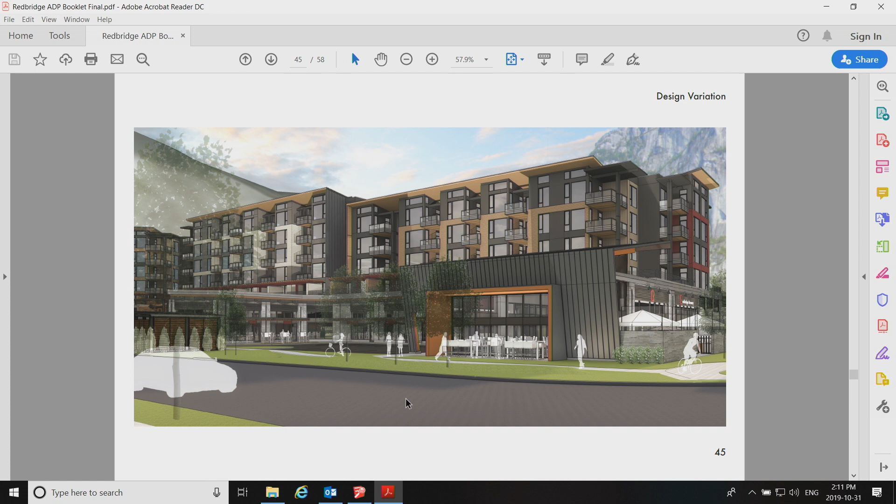And it's again the same material palette. And then if we go to the other rendering, we got that one.

So the other thing we've done is we've lengthened the amount of glass facing the highway. We've extended our retail space along the highway, and then that pitched roof acts as a bit of a catcher to the eye as you come down the highway. We've still maintained a sitting area on the highway side.

We think that would add some nice animation to the entrance to Squamish. We brought our red color back into there, and on the building itself we've decided to color the end panel, bringing our red into that one panel to give a little bit of impact to this side.

And then we've brought some extra bouldering in to really make that base feel like it's growing out of the rock. And then the concrete base, we've punched some holes in it.

We're just debating how best to handle those holes, because I don't like looking into parkades and seeing ugly lights. So we want to have a nice screen or something in there too. I like the idea of some presence behind that, but I don't like seeing terrible parkade lighting, which is typically what we have. So that's something we're working on, making sure we get that right.

We've also provided signage, and we looked at a bunch of locations for it. We felt that if we put it at the corner, it actually obscured the views up and down the highway. We thought it was a safety concern, so we brought it to the joint between the retail and the parkade part of the project, and we've created a sign that, if you close up on it, has Redbridge at the bottom.

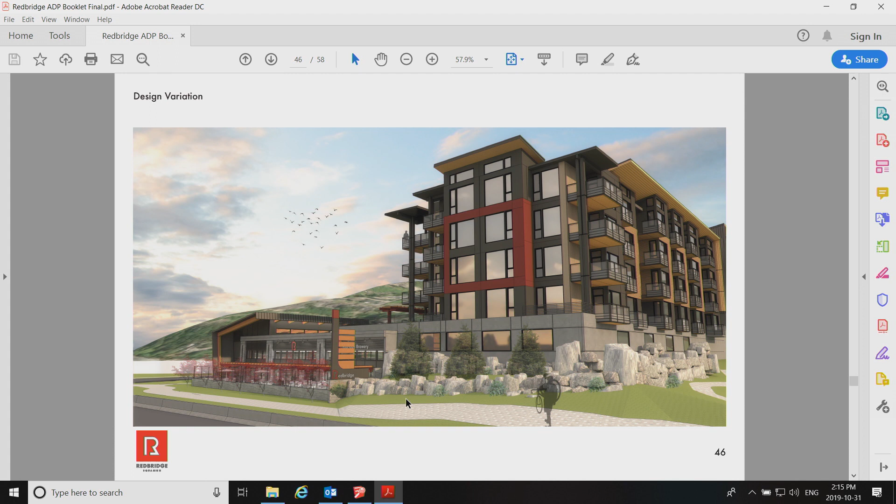And so that's that piece. We also talk a lot about social sustainability, and the project really was very much planned around that idea that we have this small retail space that I see as a real asset to the project. It's really an amenity in my mind. It's a place that we can have some gatherings, and we certainly see the parking lot as being something that could be closed off for a little festival or a farmer's market or those kinds of events. And we're going to surface it with a nice material so that it's not an asphalt parking lot. It's got a nice feel to it.

So the commercial piece is one of the pieces I would talk about, social sustainability. We have created a very distinctive child's play area, and Peter will talk to that in a few minutes. An outdoor one, and it's related to an indoor area that's really got a family focus to it, because families need different types of space than adults do, and sometimes adults want to get away, and sometimes they like to be with the families, and it depends on what stage your life is. So we've tried to do a project that kind of looks after those life stages as well as we can.

And then we have our amenity space, which is really about well-being: red light therapy rooms and saunas and cold plunge pools and hot tubs, and then the co-working aspect of the space that we put in, and then the yoga aspect of the space. So we've tried to think about sustainability as energy switching, and this kind of social sustainability is our major focus.

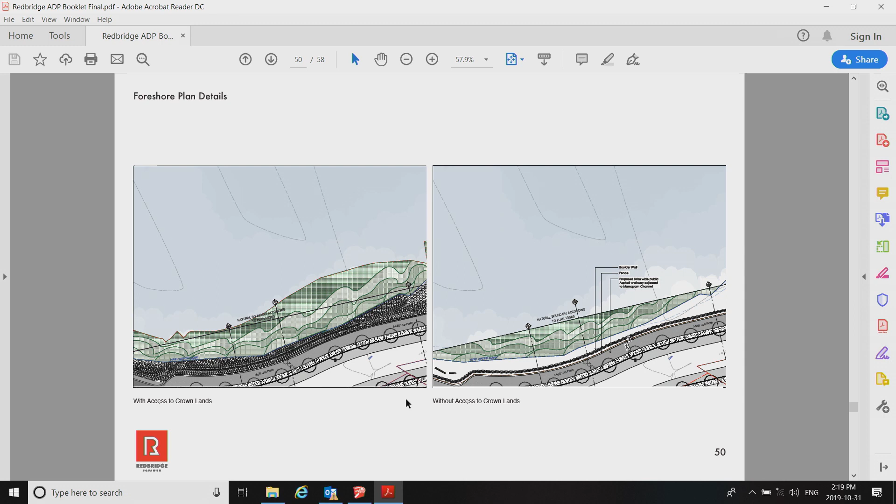The one on the left, we don't have a retaining wall, and that sort of transitional planting that we typically find on the edge of this tidal pool would come in either way. So similar plant material, just different volumes, different layout. And you can see quickly in the sections there, the upper one is as if there is no property line issue, so we just have a very simple planted slope that interfaces with the blind. The lower one shows a small retaining wall system immediately adjacent to the multi-use path, and a quicker transition into the blind itself.

We also show here the fencing that's proposed for along that edge. It's something we're working with the district on to make sure everyone's happy with it. But I think our last discussion was we were concerned about keeping pets out of that interface there, because the whole idea is to create habitat here, and we have to keep dogs and such out of there in order to allow that to thrive.

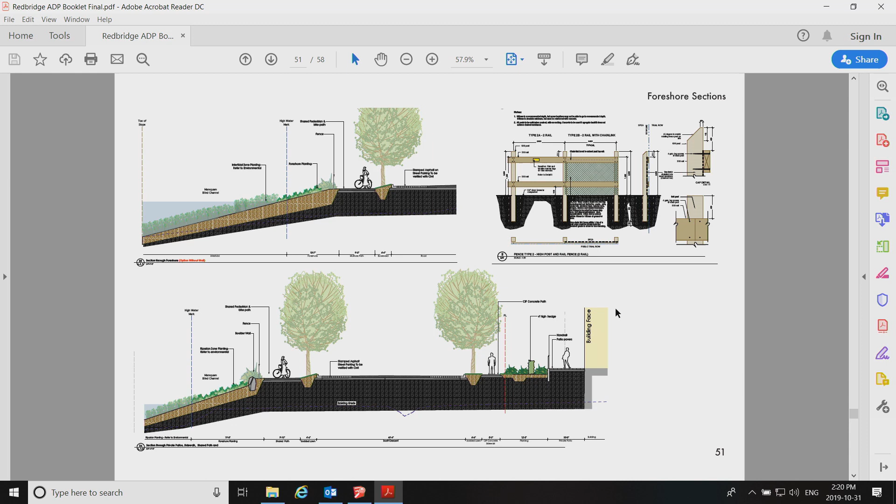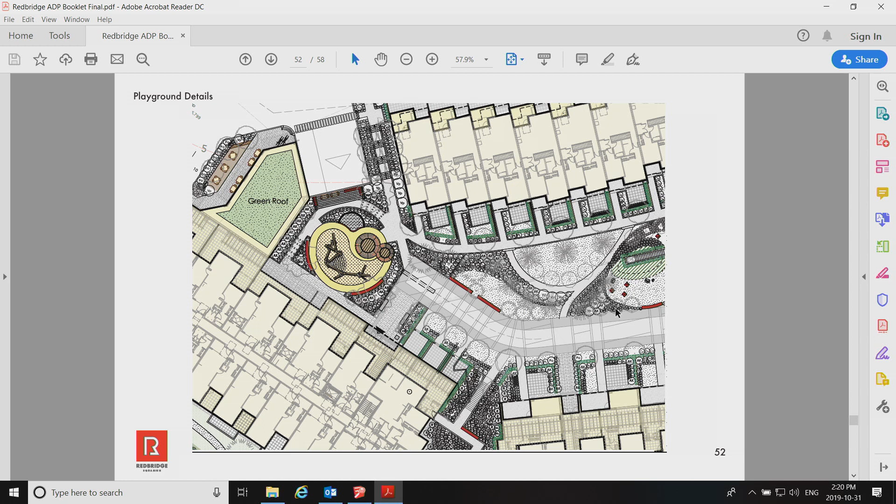So that section, there's the kids' play area. It's immediately adjacent to the indoor amenity space, which Scott was referring to. And it's a fairly good-sized space. The idea was to introduce some fairly robust natural elements in climbers and nets and such, and then a few focal elements, and I think you can see those here. You can see the rocks and the logs.

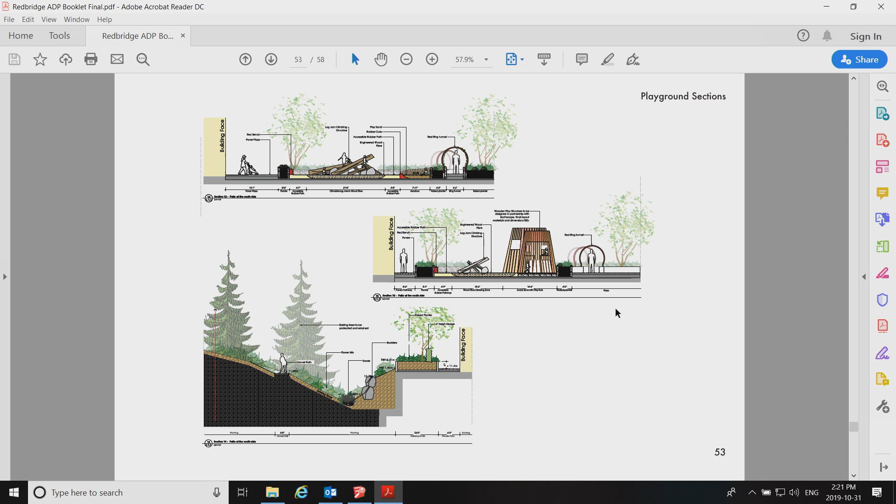We have a red archway, and then we have this hut system that is a little bit of a custom design, almost like a teepee burner, I hate to say it, but that's where it was built off of, so it reflects a bit of the logging industry in the area, and it's a robust space and a great place for kids to hang out and socialize.

We got planting plans coming out of here, so big site with a lot of plants used. The whole idea, as was referred to in the beginning, most of this project is on parkade or on slab. We do an awful lot of that work, that's what we do. And what we've done over the years is we've been increasing our soil volumes over top of slab as much as possible in order to have some water retention and adequate room for the trees to grow and establish themselves.

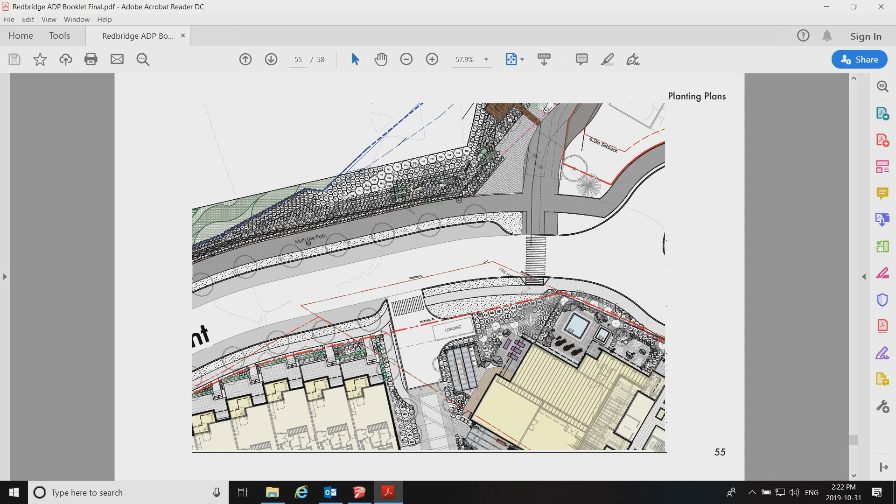So as you look through the sections here, you'll see that whenever we're on slab, we have lots of growing medium, and of course it will be irrigated using high efficiency irrigation systems. Plant materials selected so that they aren't water hogs. They're adaptive type plants. A lot of them are natives and would suit this space quite nicely.

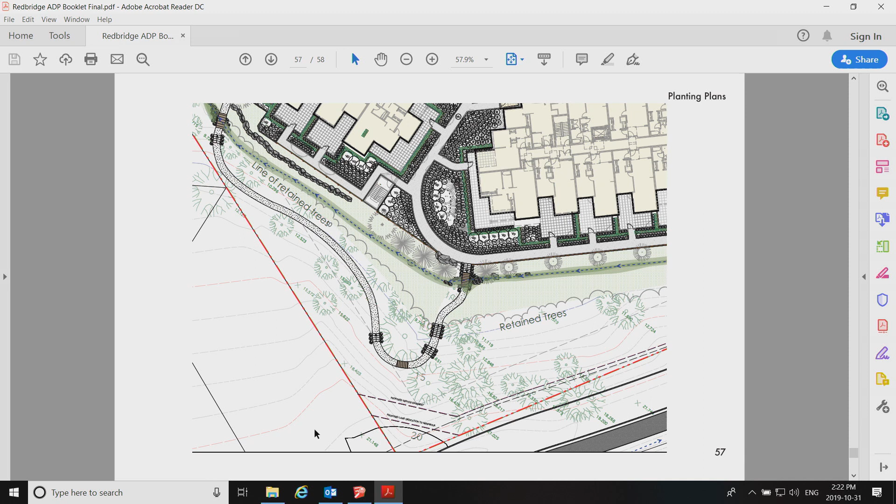And, if you could, yeah. And we've done a fairly extensive study on the edges and the site itself in order to make sure that we have maintained those soil volumes as needed. Maybe towards the end. This is a full set. There's a full set. This is going to take too long.

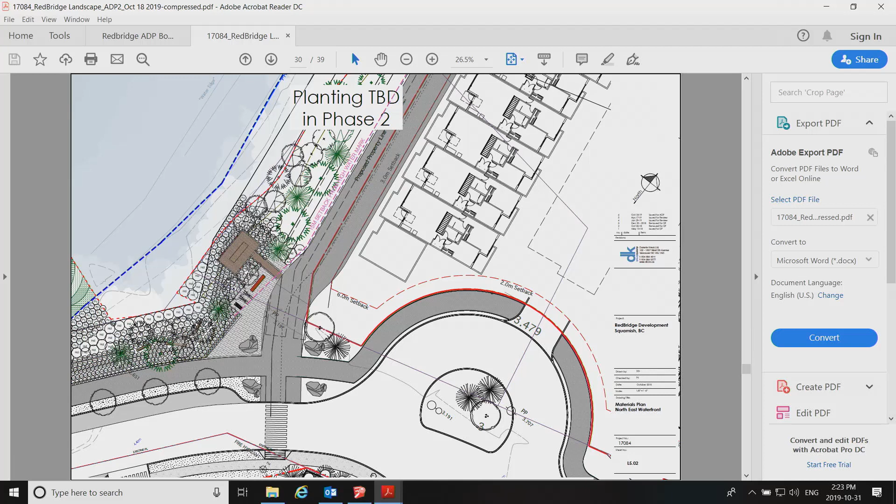There's a number of green roofs that we've incorporated, which help with stormwater. There you go, some sections there. You can see that we've got some pretty generous soil volumes, even in the on-slab areas, the on-grade areas, sorry, and then through. Yeah, those are all on grade. You can start to see. The majority of the landscaping actually is on grade in this particular case. There's just that one. It's all the edges and things. Yeah, the edges.

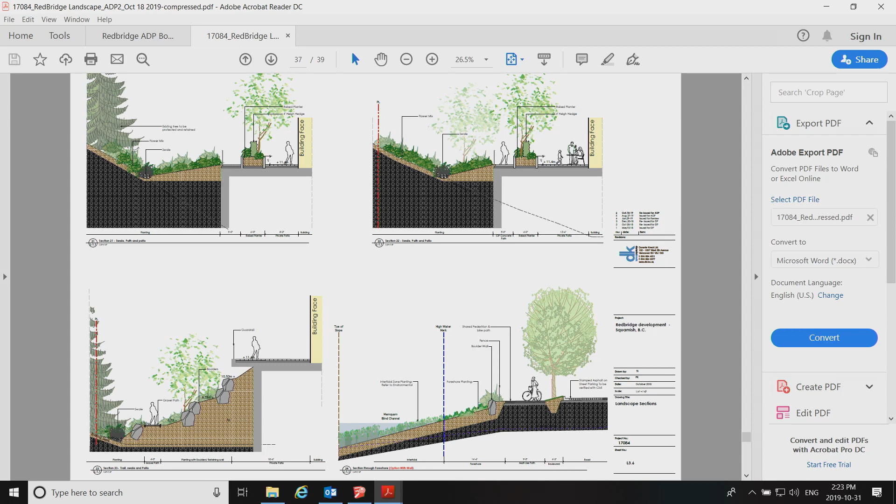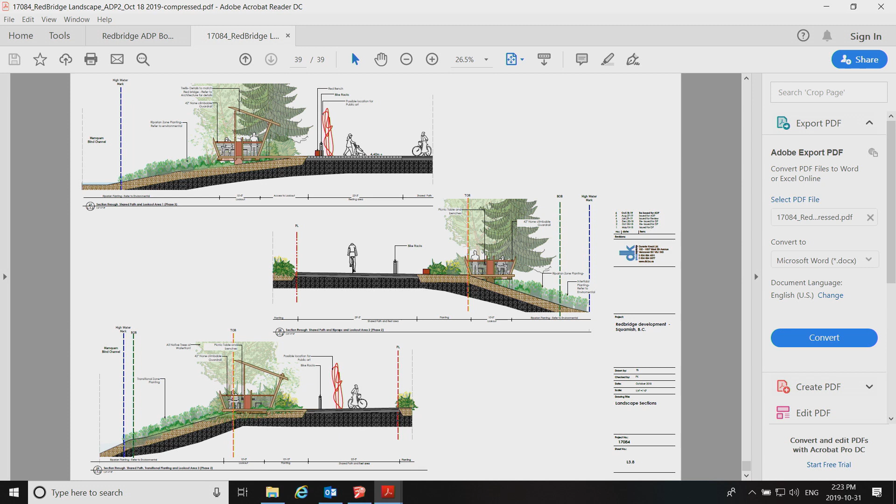So I think when we've gone through, we've studied all the interfaces. Tree retention along the edges is important, and we will be putting a tree management plan together before any earth starts to be moved. And we've looked at the dike, or the multi-use trail that goes out to the new Red Bridge, some structures that will overlook the blind. A lot of those things have been explored and shown in the drawing sets that we present. All right, I think that's pretty much the majority of our presentation. Welcome to have panel.

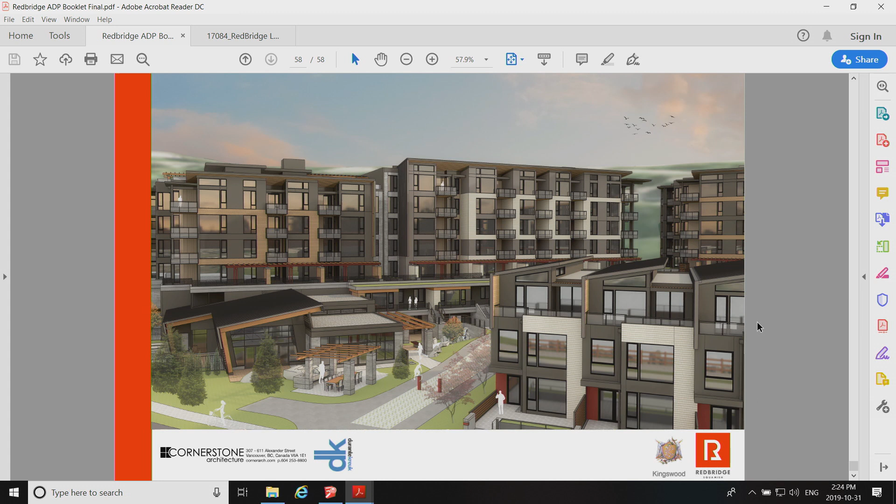Okay. Thanks very much. We will do a round of questions on what we've heard so far and what we're seeing. Start with Graham. Sure, great. Thanks for the presentation. Thanks for bringing this back so quickly. I think most of my questions were kind of addressed. Thanks for bringing up sustainability. I didn't see it in the report, so thanks for noting that.

So maybe just to get clarification, so sustainability, you're still going with the Step 3, which I think was noted last time was commendable. I'll call it an enhanced Step 3. I don't think we can get to Step 4. And we're not doing the energy modeling within our own office, so it's a little harder; it's our mechanical consultants that are doing it in this particular case.

We're aiming for an enhanced, I'll call it an enhanced Step 3. I don't think we can get to 4, but we're looking at trying to make sure we got good air tightness details. We've over-insulated beyond slab edges so that we've dealt with those kind of thermal transitions that, like I said, once you've seen one and you understand them, you just start to naturally do some of those things.

So we're doing our best to, I'd call it enhanced. I won't commit that we're going to get all the way to step 4. So since the last application or proposal, the change would be that you've got more direction to go towards the energy switching of the hot water. Energy switching of the hot water is the major change.

Mm-hmm. We are also, overheating is becoming a big deal. And what I found in our first passive house buildings is, 3 feet of overhang on a 6-foot window is hardly worth doing. It just doesn't work. So unless you're doing exterior shading, you're going to have to do something else. We're going to be putting in fans, actually big ceiling fans, because we are finding that that air movement makes a significant difference in how comfortable people feel when something gets a little warm, which is going to happen.

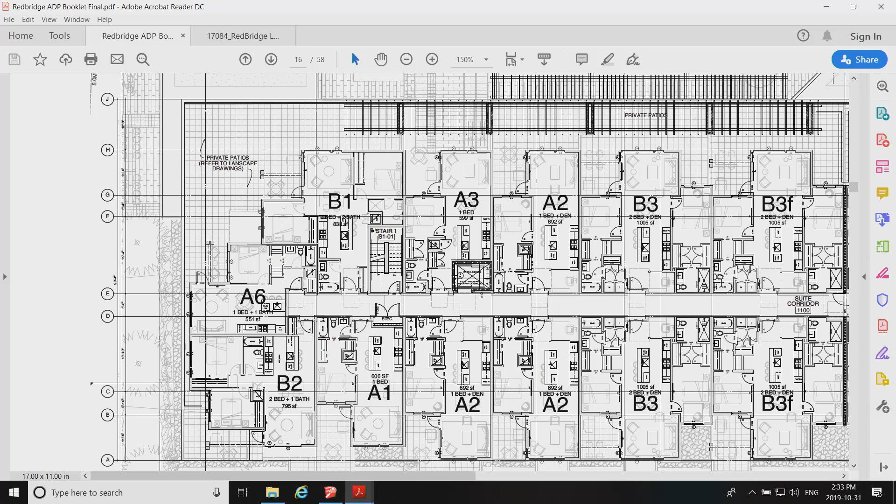They're all for purchase. So if somebody's pre-purchasing, are they able to have a real shower versus a bathtub? I can't see why that wouldn't be possible. Most of our units, if it's a 2-bedroom unit, we will have put a shower in the master and a tub in the 2nd bedroom. That's typically how we would do a 2-bedroom. In a 1-bedroom, I know I'd order mine with a shower every time, but my wife would order one with a tub every time.

Who's going to lose? Get a 2-bedroom. I'm going to lose.

And then the rings, I'm just confused as to where they are relative to the play structure. They're on the pathway that runs just along the edge of the play structure. So it's part of the area. Oh, there they are. It's right there. So it is accessible. It's the pathway through those. Great. You can see it there on the screen. Cool. Those are all my questions tonight. Thank you.

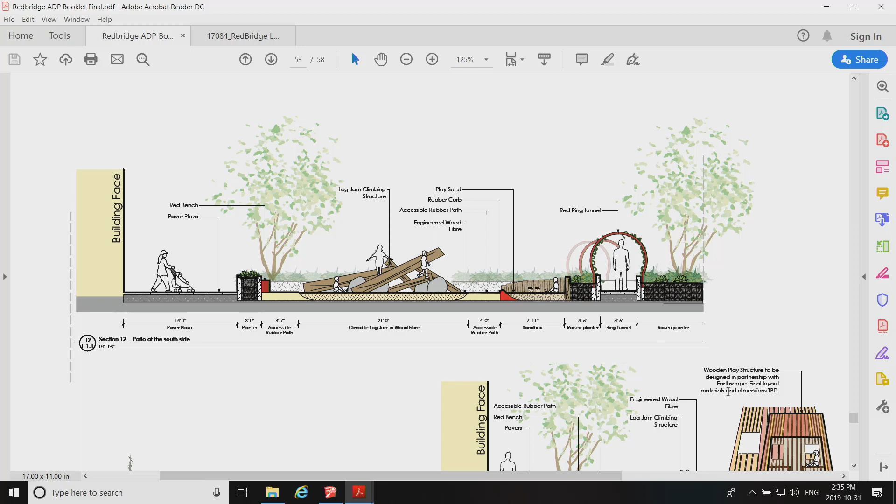Thank you for the presentation. My only question is about the foreshore. Could you bring that section up? Sure.

I guess I'll ask the question while you're bringing it up. Without access to crown lands, does that straight line become a sheet pile wall? No, it still is a transitional. The wall goes up; on the cross section it just doesn't show PL. Yeah, I know, but if you look at the lower section, the wall goes adjacent to the multi-use trail. That's where the boulder wall will go. And the rest will just slope down, so there's no sheet pile.

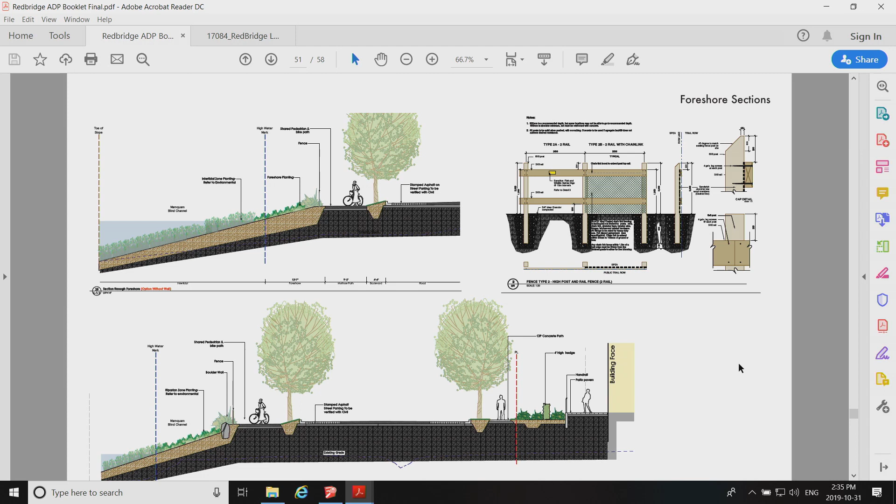That looks like a PL there, isn't that the PL? That dotted line? No, that's high water. Oh, that's high water. So I see you put soil there. Is there no requirement for riprap or any type of hard scour protection in that area? No, we're going to plant everything, because it's fairly flat. If it were steeper, yes, but because it's so flat, it's less than 3 to 1, so we're okay.

And are you aware of what the FCL is for this site? Flood elevation? Yeah, 5 meters. So we're having to bring the site up about 2 to 3 meters from its current grade. The road's coming up. That's one of the reasons it's a challenge, because the road's already on the edge and we're having to raise it. If you look at these sections where the heavy fill color changes, that's where existing grade is. So this is all built on top of that. The road is at 4.3 and our FCL is at 5. Okay, that's all for me.

I missed the first one as well, so I apologize if I ask any duplicate questions, but the loading bay next to the P2 parking access, can that accommodate any type of commercial vehicle, or is it capped to a certain size? It takes a large vehicle. I can't remember how long we made it, Joe, but it's not going to take a semi, but it'll take a decent vehicle. Yeah, it's a pretty good sized loader, bigger than what we did last time.

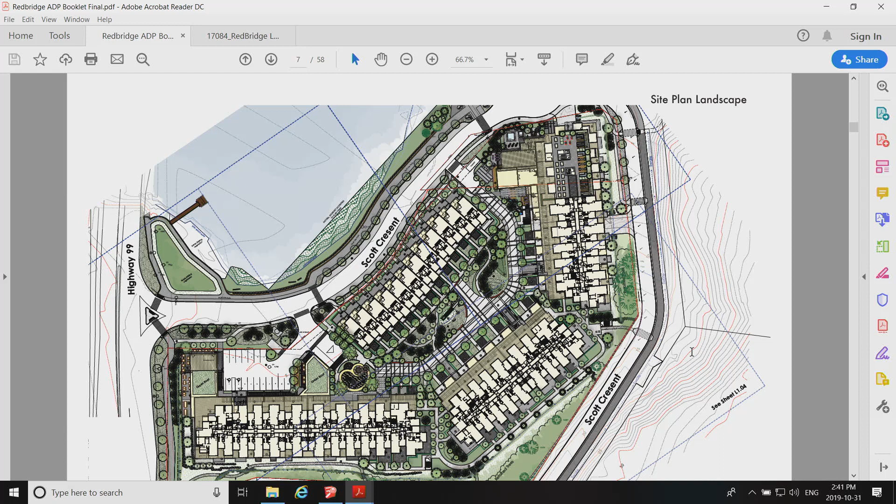Two more questions. The park, the green space that's across the way from the cycle path, what is that? Is that just flat? Right now it's existing regrowth, and we're just going to keep that and then work the pathway on the lower and upper side of it, but try to keep the natural vegetation as it is in the middle, and we'll deal with the transitions.

The idea there is to create the path so we can take it to a kayak launch. So that's what that float is out into the blind channel there, for the kayak. That's part of the reason we wanted the curbside parking, was so that the public could bring your kayak on your roof and launch it off of that kayak launch. So that's part of the thinking behind that.

Last question, what is the soffit material? It's a product called—we can't use wood because of the fire requirements, but believe it or not, this plastic-like material we can use. That's the product we're going to use. It's called Sagaper or something like that. Anyways, we really did want that kind of natural wood feel to it, and that was the best interpretation we could find, but it meets the fire requirements that we had to meet.

Thank you. So with regards to the green roofs, it looks like they're located above the two commercial buildings on the south side of the project. Is there any additional, or are those the locations? Yes, there's some little townhouses that now have green roofs too. There's also the connection above—you're not seeing it in this plan, but those are green roofs, it's a continuous green roof, it's just the way it's drawn, you can sort of see it there.

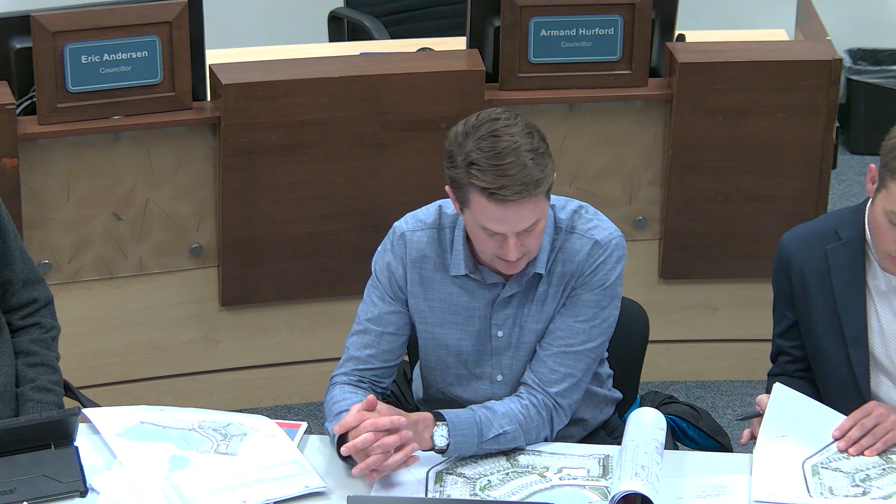They're going to be using them at different times of day, and just speaking also from my lived experience in townhouses like that and play areas like that, I think the positives are adjacent to the townhouses and on the walkway, so that's great. But I think having that second space where the adults can be doing something while having eyes on the kids, I think that would be a great opportunity.

Just the massing and expression of the individual buildings. I think it's getting there. The one thing I'm getting hung up on in the DP guidelines is individual building identity. So maybe if there's a way you can express the individual buildings, maybe just through color or something, that would be positive.

Other than that, the commercial frontage I'm fine with, and the loading bay, I think if that can be given up and used for additional area to serve that amenity building, green space or something else, that would be great. That's all the comments I have.

Thanks. All right. I also don't have a ton of comments. I think that likewise the loading area should be on public land. I think that would be, if the district is comfortable with that, preferred, a better use of space. Yeah, I think overall comfortable with it.

Thanks, guys. I only have 2 comments. I think the commercial space looks, I think I wrote down, much more impactful and purposeful looking as opposed to the first one where it didn't really stand out as much. I think you guys have done a really good job with that one.